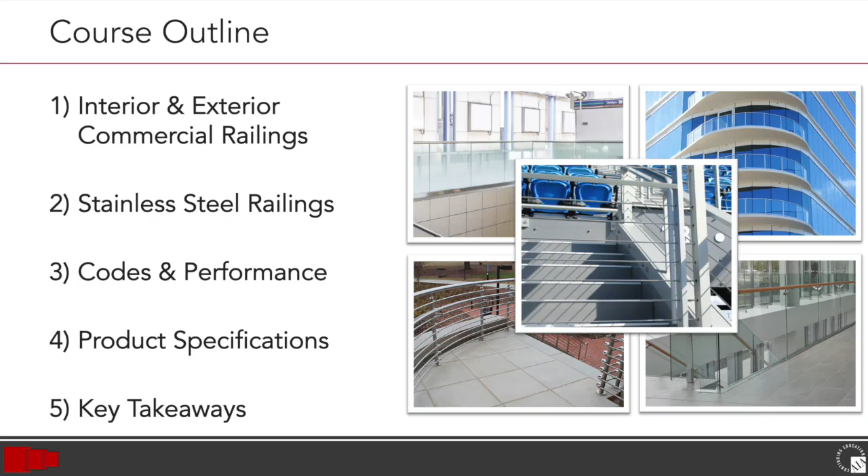First, we'll start with an overview of interior and exterior commercial railings, discussing the various railing types, materials, and designs. Then we'll discuss stainless steel railings, sharing the features and benefits in using stainless steel as a railing material and the various design options and grades of stainless steel. Next, we'll provide a high-level overview of codes and performance related to commercial railings, then get into the considerations for product specifications, and then wrap up with some key takeaways from the presentation.

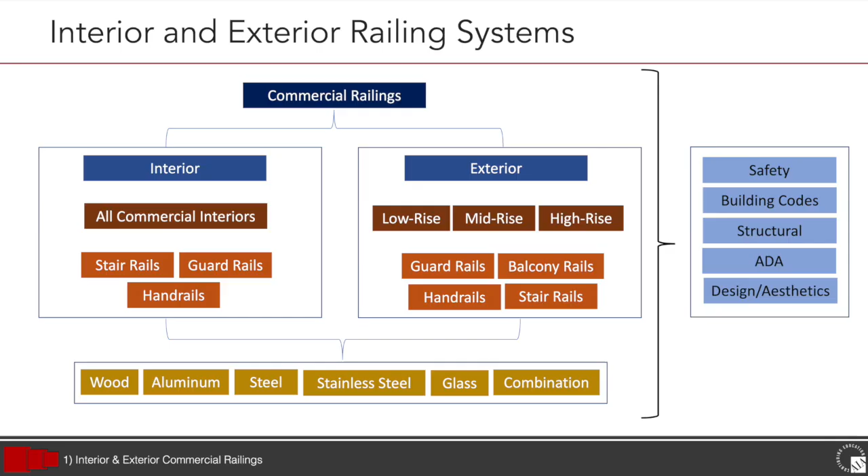So, in its simplest of terms, commercial railing systems must provide safety, must meet local and national building code requirements, are an important architectural element of your building, can actually help define the building's facade, and today more than ever, there are many design options to consider.

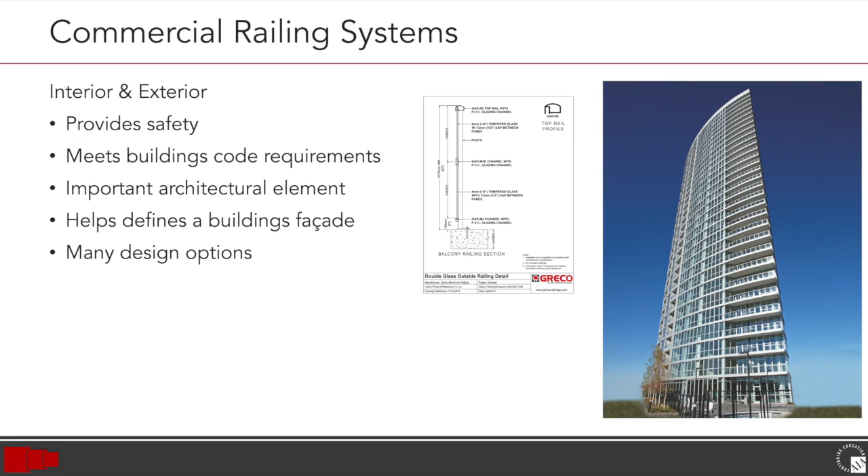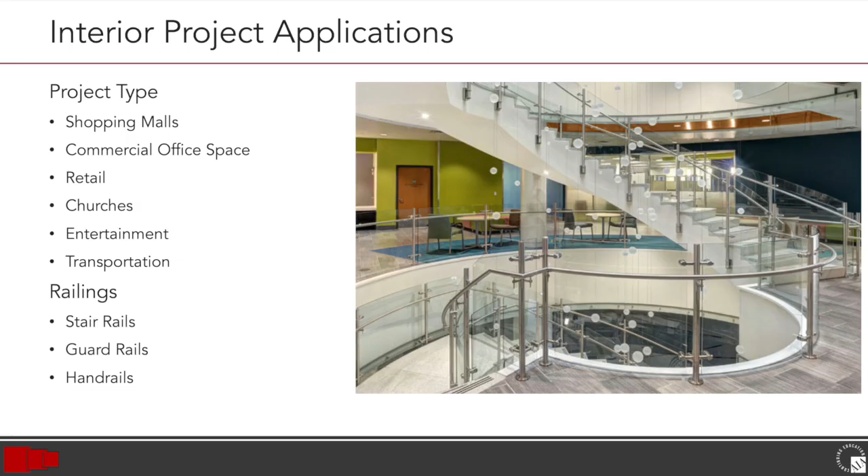So let's first take a look at interior projects. The type of projects where railings play a critical role can include, but are not limited to, shopping malls, office space, retail, churches, entertainment, and transportation. The most common types of railings in these projects are stair rails, guardrails, and handrails. When we look at exterior railings, we typically see them play a critical design role in multifamily construction, commercial buildings, and institutional projects. Typical railing types in these applications include guardrails, balcony rails, and handrails.

Now let's look at the different types of railings. When we're talking about railing types and designs, we have pickets, panels, glass, cable, and custom. Let's start with picket railings. Traditional vertical pickets are by far the most popular railing design. It can offer both a classic or a contemporary look depending on design and material. Picket railings are strong, attractive, and versatile, and are widely specified on commercial projects due to their refined elegance and longevity.

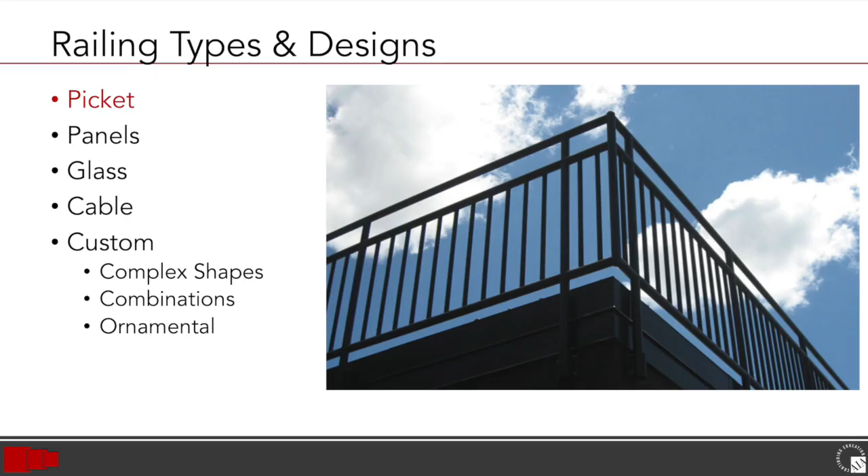Panel railings, or railings with panel infills, can be as simple as plain metal panels or decorative perforated panels. Perforated panel railings can be designed with custom punches and can offer a wide range of shapes and designs. Although plain metal panels are an option, most panel designs offer a perforated design pattern to add interest to the project while still providing a level of privacy and concealment.

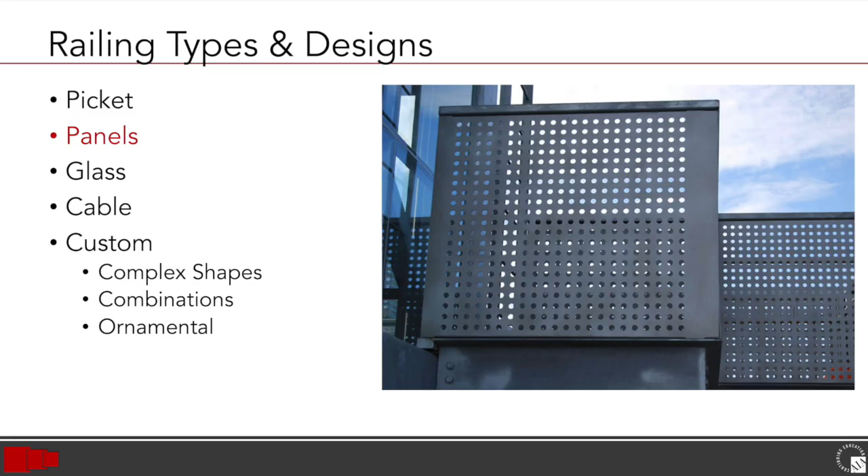One of the most popular infills for commercial railings is glass for both interior and exterior applications. Today we see glass railings in almost every railing application. Glass can be used as a traditional infill or as a structural railing on its own without post or top rails. Glass is one of the most versatile products in the industry, offering a contemporary look with a high level of performance depending on the railing design and glass makeup.

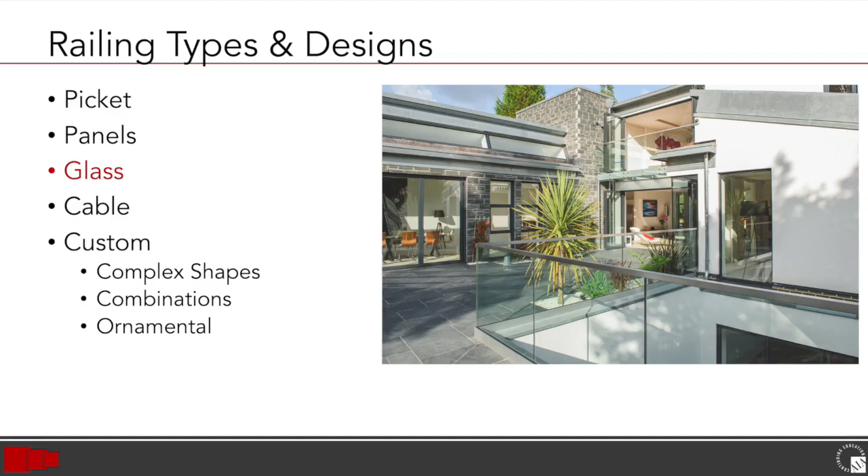Cable infills have become a popular choice for railings as they are both contemporary in design and provide minimal obstructed views. The cables can come from various diameters, typically ranging from 1/8 of an inch to 1/2 of an inch. Cables are typically stainless steel due to the rigidness and durability and looks.

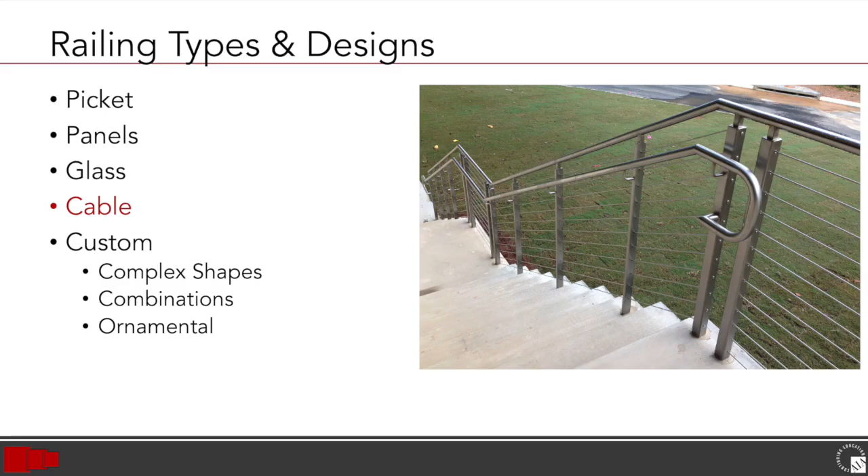Custom railings can offer a combination of styles or designs with unique shapes, colors, and finishes. Custom railings can range from traditional ornamental to sleek and contemporary, with both simple and very complex shapes. Now let's take a look at the various materials and components that can make up a railing. As railing types can create a specific design or look, the material used can define the style, performance, and durability.

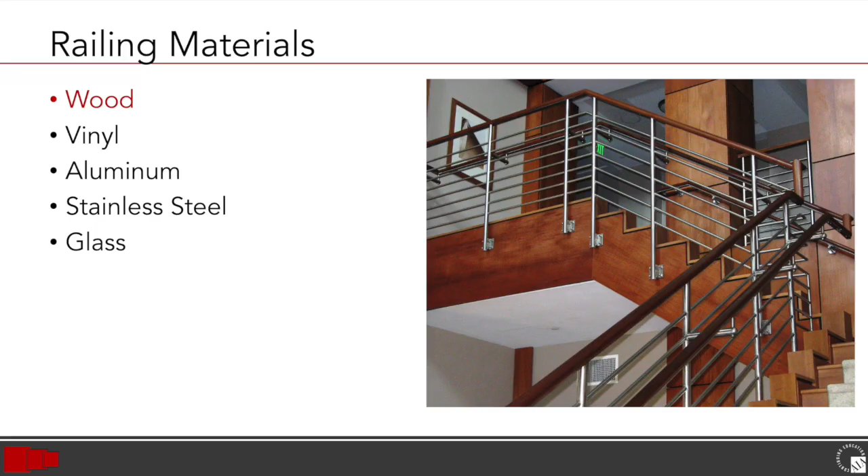Commonly used materials for railing posts include wood, vinyl, aluminum, stainless steel, and glass. Wood provides a classic look, and as long as the wood is treated properly, they should be durable and have a relatively long lifespan. With wood posts, the force is directed to the joists and rim joist connections, and so builders need to pay close attention to post and joist framing procedures and select the most appropriate fasteners. There are a wide variety of framing techniques, each of which carries with it different challenges and cost.

Vinyl railing systems are considered low maintenance because they are easy to clean with common household solutions and do not require painting. Vinyl does not rot like wood and does not corrode like some metals. However, in some geographic locations, the stability of vinyl can be affected by extreme hot or cold temperatures. The structural posts and top and bottom rails are commonly reinforced with aluminum or steel, and with metal-to-metal connections and hidden fasteners, the aesthetics of the railing systems remain intact.

Wood plastic composites offer a look of natural wood grain patterns in a variety of colors, but unlike wood, they do not need to be stained or painted. They also have a much lesser tendency to rot, warp, or splinter.

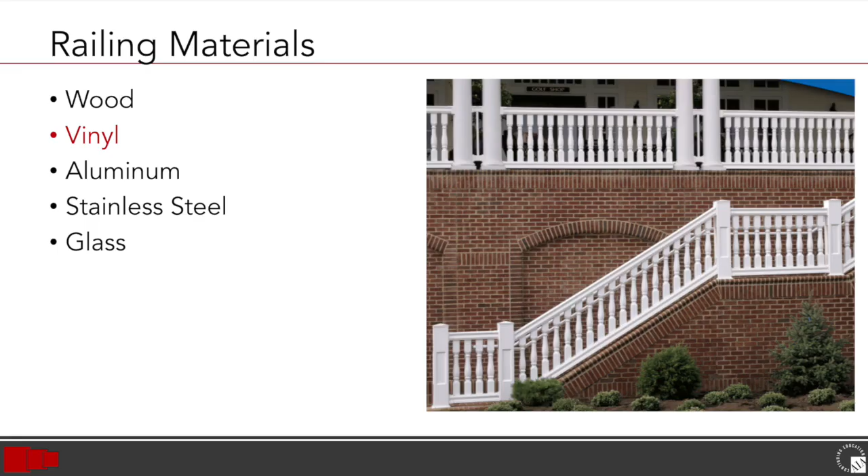Aluminum is commonly used in off-the-shelf systems because of its lightweight and easy installation options, and because they tend to be more durable than wood or vinyl. They distribute the load well and are usually coated with a powder coat finish to help prolong the life of the metal. Aluminum is a non-ferrous metal that is lightweight, strong, and known for its resistance to corrosion. Aluminum railings can be powder coated or anodized to meet the aesthetic requirements of the project, and over the long term require relatively little maintenance.

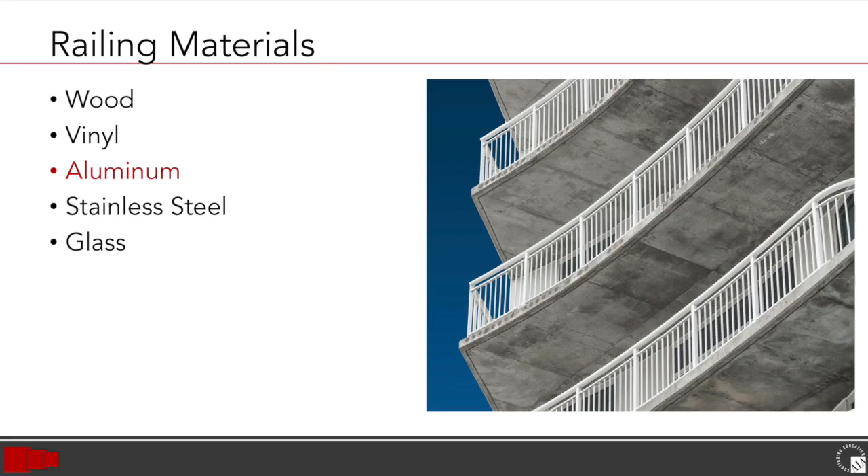As a railing material, aluminum offers ease of fabrication and versatility in design, and as such is used for structural components and decorative panels. Although commonly used in areas that require greater resistance to corrosion, aluminum is one of the softer metals in use. Aluminum tube is available in a large variety of shapes through the process of extrusion. It can be cut, deburred, or welded. Fasteners and fittings are readily available and used in conjunction with tube, adhesive, and/or welding. This makes for an effective way to build railings.

Stainless steel tends to combine the best of all worlds in that they are strong, durable, and are usually engineered to exceed most local building codes. Stainless steel can be fabricated with a range of finishes. Stainless steel can be brushed, polished, powder coated, and plated easily. It resists corrosion very well and has the capability to maintain its luster for a long time, and maintenance requirements are low.

Stainless steel, like steel, is stronger and more durable than other metals and therefore allows for leaner designs to be employed in railings. The major advantage of stainless steel over steel is that it is more resistant to corrosion. Again, like steel, stainless steel tubes can be found easily in round, square, rectangular, or oval shapes. It can be cut, deburred, and welded. Additionally, fasteners and fittings for stainless steel tubes are readily available.

As we've mentioned earlier, glass as a material is extremely durable and can be used structurally without post and top rails. The glass makeup and how it's treated will dictate the strength of the glass. Glass can also be tinted or colored to create visual interest or to provide privacy.

Let's take a quick look at the typical components of a railing system. Traditional railing components include a railing post, the railing infill, and the top rail. Together, these components make up the main visual and structural element of a railing system.

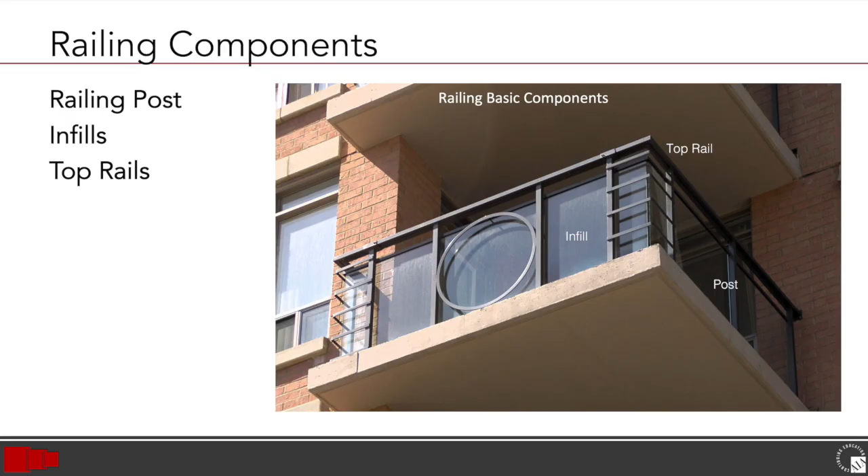There are many different options for component materials, with either a single material or a whole system, or with different materials combined for a railing that is unique to the specific building project. In addition to being designed to enhance the building aesthetic elements, railings should be designed for strength, durability, and safety.

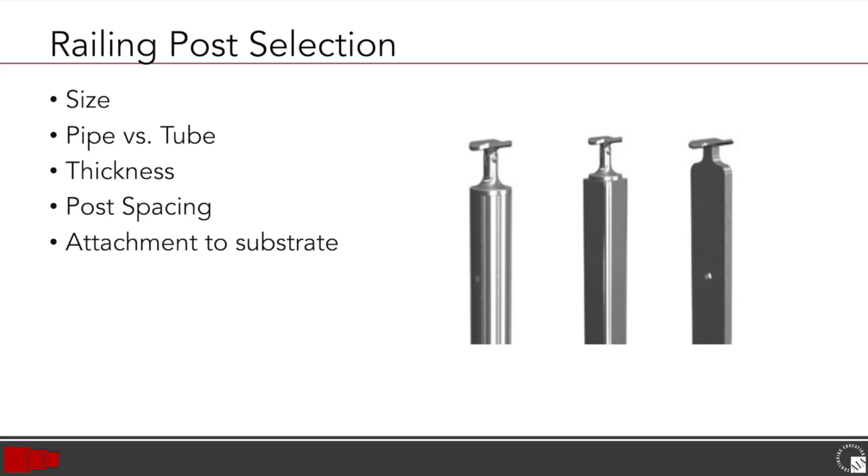In general, when selecting the railing post for a typical railing system, the critical design elements include the size of the post, spacing, and the type of attachments. Additionally, for metal posts, you need to consider pipe or tube post and the thickness of the metal.

There are three basic post attachment methods or mounting options: side mounts, top mounts, and core mounts. These different mounting options can vary based on various circumstances. Side mounts are mounted on the fascia and cannot be seen from the deck or floor.

Top mounts are fastened directly to the top of the deck or floor, with the fasteners being exposed or covered with a cover plate. And core mounts are core drilled into the deck, typically concrete, creating a concealed attachment. Base plate covers can be applied for aesthetics.

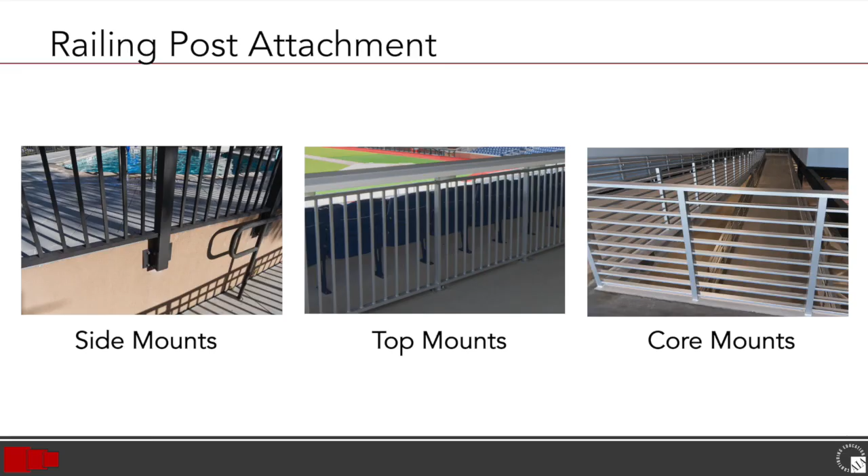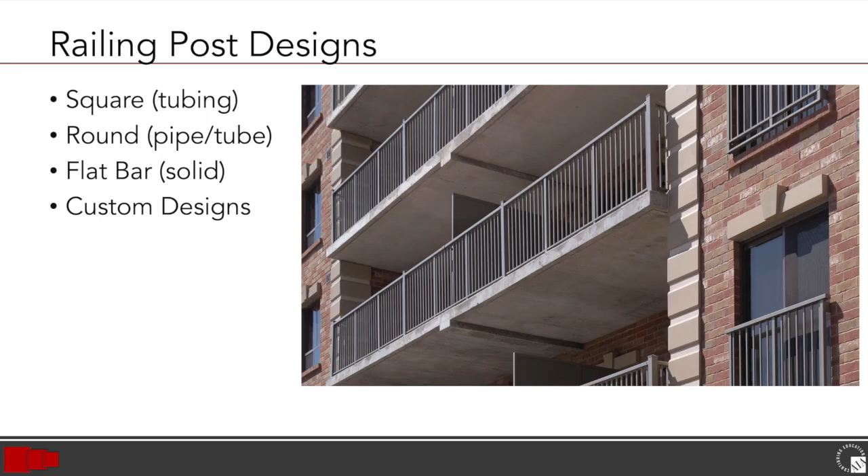For metal railing posts, there are a variety of railing post design options. Typically, you'll see square tubing, round tubing, a flat bar post, or a custom design post. The infills are where things get interesting, creative, and really define the look of a railing. Functionally, the infill is a critical component of the railing system and its performance.

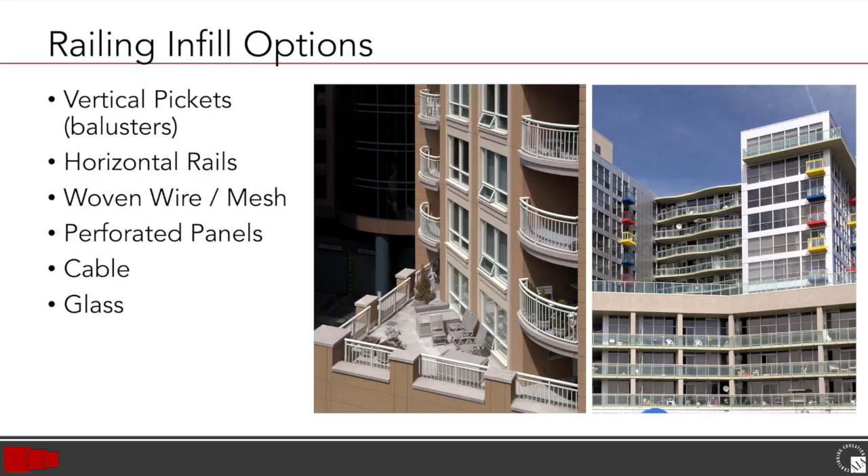Infills can be made of bar rails or balusters and run vertically. This type of infill on railings is referred to as a vertical picket, or more commonly, picket railings. You can also have bar rails that run horizontally for a more contemporary look. Woven wire or metal mesh is another infill option.

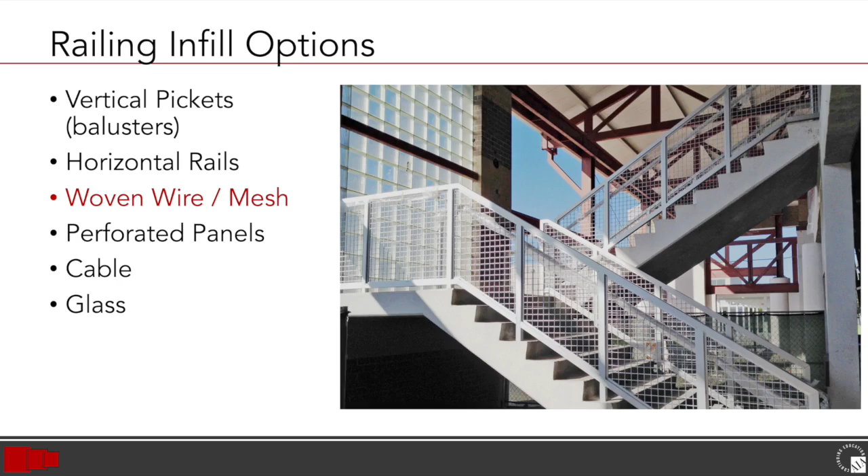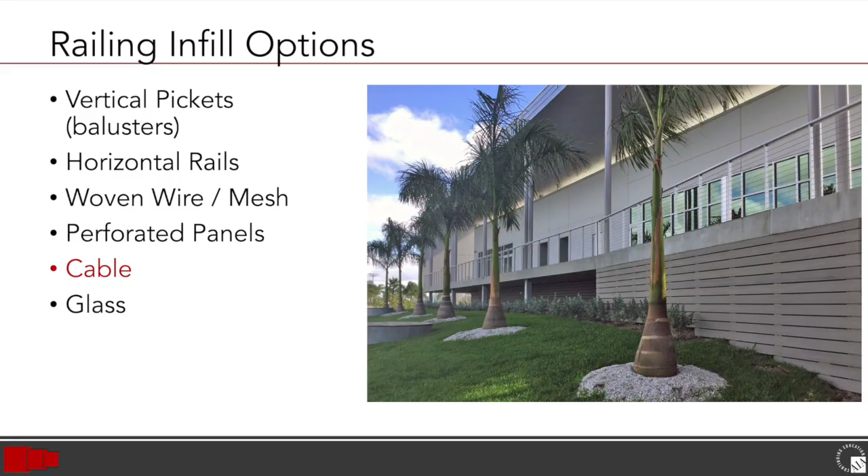Perforated metal panels can offer a contemporary industrial look. Cable infills can be designed both horizontally or vertically and provide a great option to minimize visual obstruction. And last, as discussed earlier, there is glass, which can be used in a traditional railing infill.

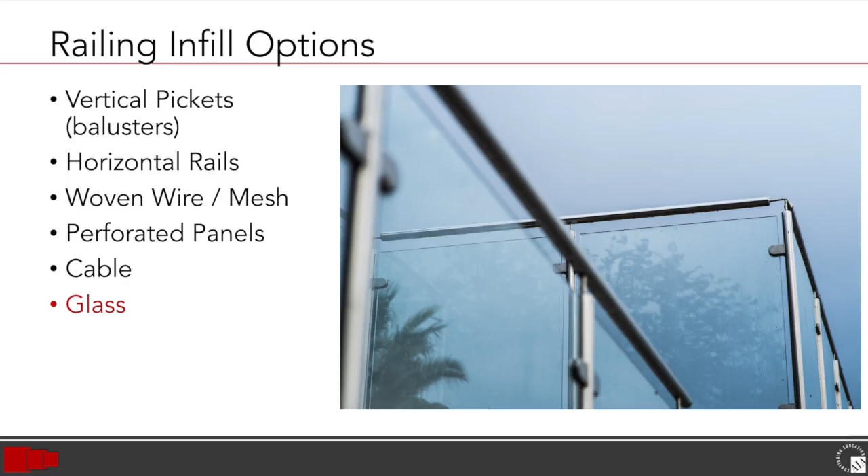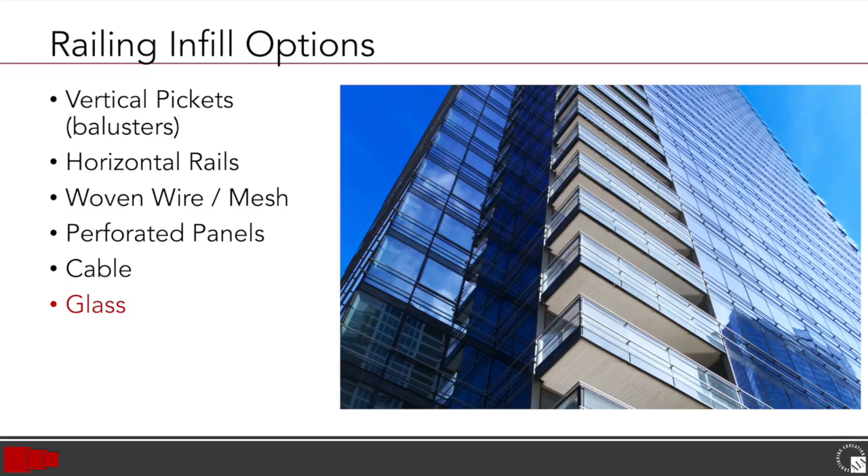Depending on the placement and purpose of the railing, health and safety considerations will also factor into the material and infill choices. For example, a railing system on a multi-story apartment building or hotel may include tempered glass panels as infills to provide a solid physical barrier between the decks and the ground.

Alternately, a homeowner who installs a new deck in their yard may desire a railing that provides a clear line of sight to the yard without the frequent cleaning required of glass, and in this case, cable rails may be the perfect solution, or vice versa. In short, the project needs and desired aesthetics will determine the infill solution and the material.

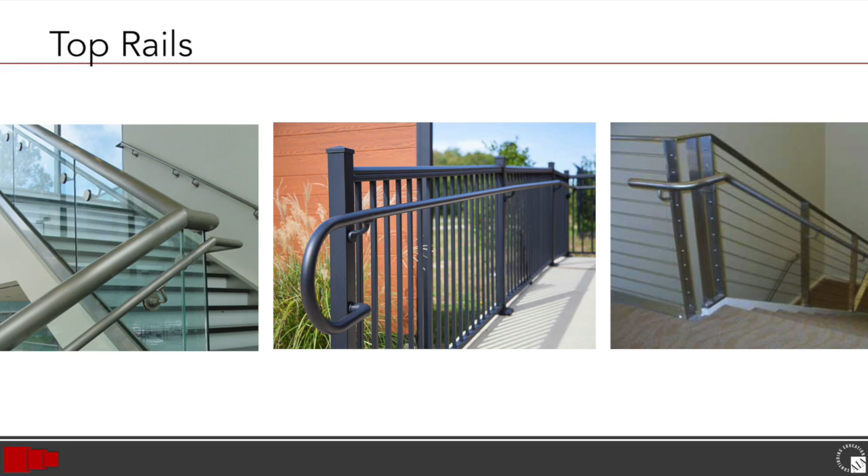Not all railing systems have top rails, as you can see in this glass railing system. When selecting or designing a top rail, there are many factors to consider, such as style, shape, material, color, and finish. The choice of a top rail can also be based on function. For example, a flat surface for placing objects on, or an easy-to-grasp railing for stairs, as well as aesthetics with contemporary or traditional styles.

Top rails can be designed to be attached to the face of the post using rail connection brackets, while others rest on the tops of the post and are secured with fasteners. Handrails, as we mentioned earlier, can have extensions and returns and are available as an accessory or custom design to meet ADA and specific handrail building codes when required.

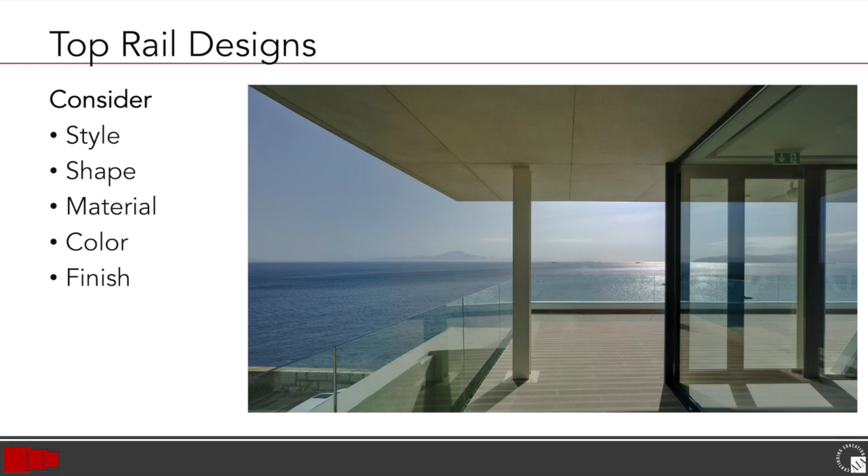As with posts, the top rail is also usually made of wood, aluminum, composites, or stainless steel. The material choices have similar pros and cons. For example, wood top rails make an aesthetic statement and work well for interior railing systems.

However, even the best treated wood will eventually give way to the elements when used outdoors. Aluminum and composite materials are subject to wear and tear as well. Additionally, some composite materials require a supporting structural component to reduce the risk of deflection in the top rail.

And as with posts, stainless steel works as an ideal material because of its longevity, corrosion resistance, and finish options. For example, a brushed stainless or satin finish can be beneficial for top rails to retain less heat than highly polished surfaces, and thus ensure that the railing can be comfortably used even in the hot sun. The benefits take into consideration the health, safety, and well-being of building occupants and the general public by allowing the rail to be used regardless of the time of year, all while allowing the designers the freedom of creative design for aesthetics.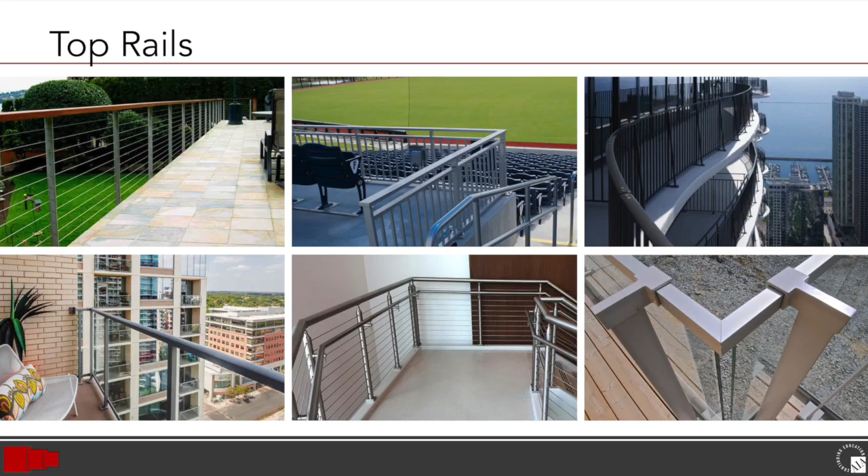So now let's dive into our main topic of stainless steel railings. Stainless steel as a material is one of the most forgiving materials when it comes to durability and aesthetics. Stainless steel resists corrosion and is very easy to maintain, whether used for railing systems or home appliances. The aesthetic element stems primarily from how the steel is finished, whether that finish achieves a highly polished mirror look, a refined brushed satin look, or adds color and texture through the powder coating.

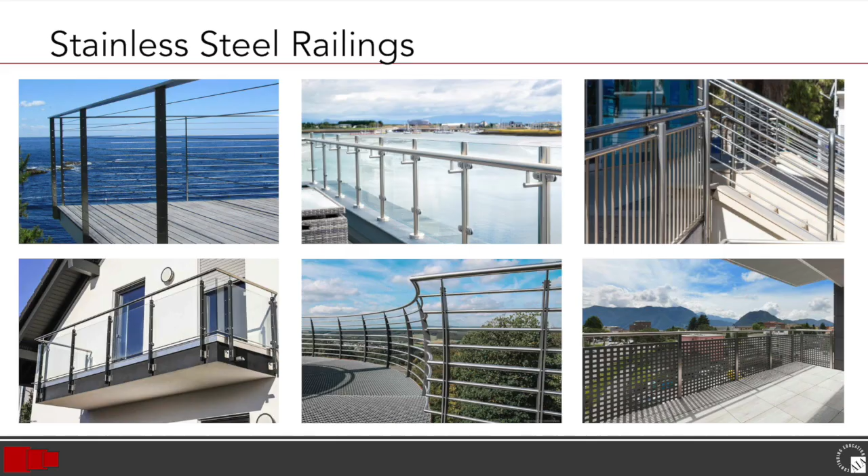In this section, we're going to address 3 areas. Why use stainless steel? We'll look at the advantages and benefits of using stainless steel. Then we'll review designing with stainless steel, addressing some of the design options that are available. And last, we will discuss the various types of stainless steel grades and the importance of understanding which type of stainless steel grade should be used.

So why design with stainless steel? Well, there's a multitude of reasons and benefits to consider. Let's start with strength. Stainless steel is stronger than aluminum. The tensile strength is measured as force per unit area, and in the international system of units, the unit is the pascal. A multiple is called megapascal, or MPa. The ultimate strength for stainless steel is 590 MPa versus that of 300 MPa for 6061-T6 aluminum.

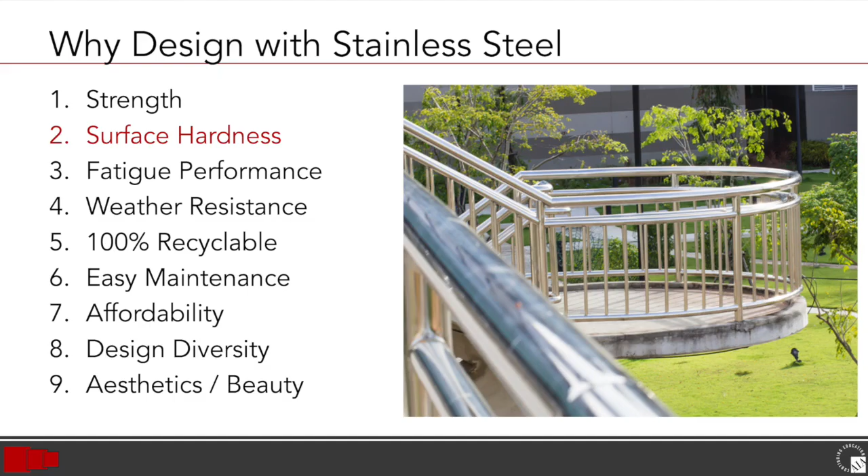The benefits of stainless steel's additional strength are evidenced in the railing system's posts and handrails, which can be constructed to be much thinner than those made of aluminum. A strength equivalent stainless steel post is 50% thinner than an aluminum post. Moreover, the surface hardness of stainless steel is much higher than that of aluminum, and thus it resists scratches and is easy to maintain as compared to aluminum counterparts.

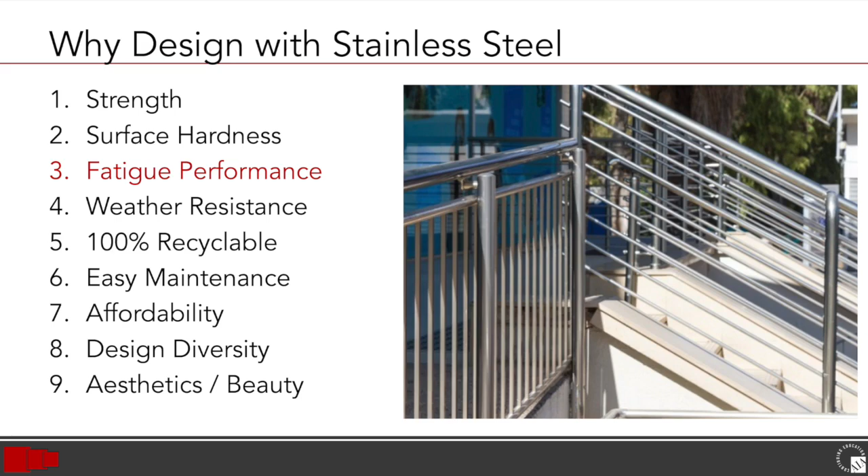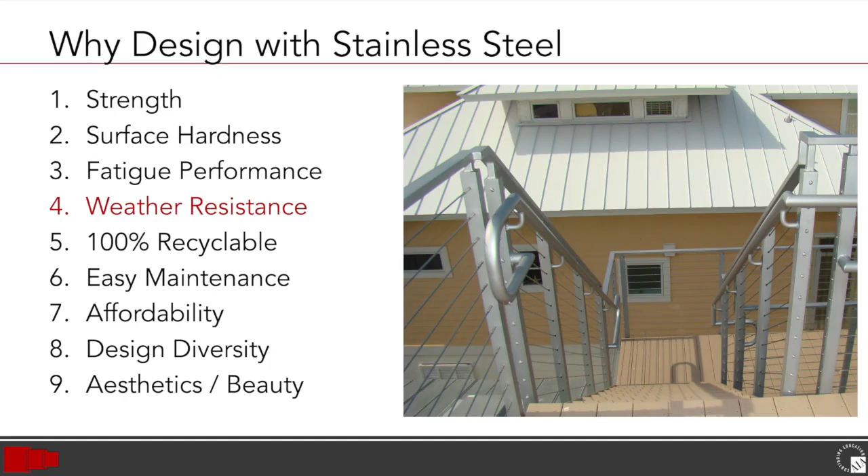Additionally, stainless steel's fatigue performance is twice that of aluminum, and that adds to the product's durability. In terms of railings, a stainless steel rail will likely provide more years of safe, aesthetically appealing use than an aluminum system. Stainless steel railings offer superior weather resistance compared to any other railing material type. Stainless steel is the most immune metal to corrosion and is not affected by the sun's ultraviolet rays, providing a long-lasting, weather-resistant material.

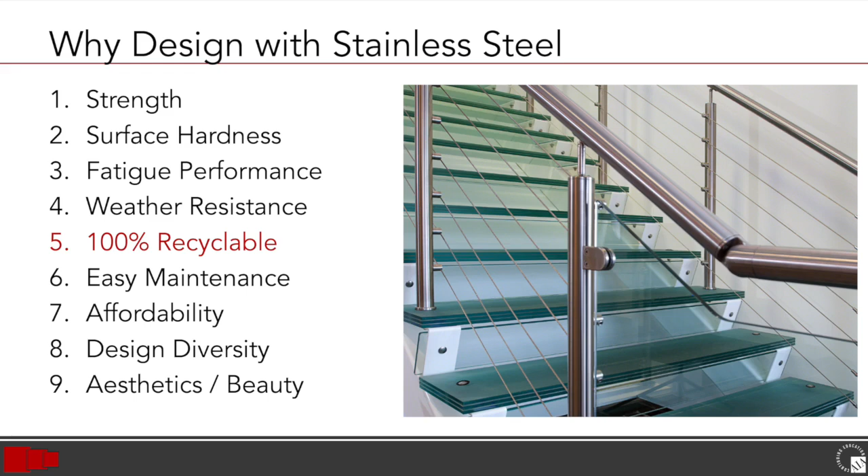Stainless steel is readily recyclable, encouraged by the ease of traceability and inherent value. This therefore helps to reduce the overall environmental impact of a structure, which is an important factor when considering choice of materials. With some of the features just highlighted regarding strength, surface hardness, resistance to corrosion, and weatherability, stainless steel is almost a carefree material. To remove any dirt, marks, grease, etc., wipe it down with a damp cloth. That's all you have to do for maintaining a stainless steel railing. They are low maintenance because stainless steel railings will not crumble, fracture, or bend over time.

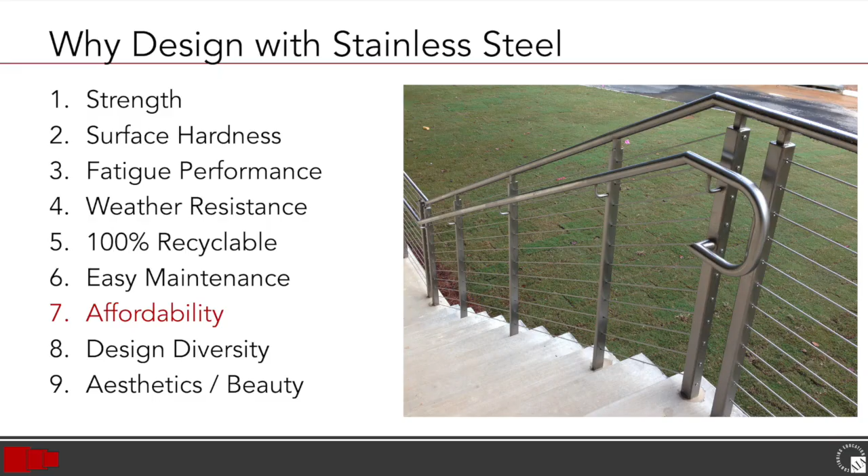Affordability. This is probably a benefit that you would not think of when it comes to stainless steel. But because stainless steel is a much stronger material, it takes less material to generate an equally strong railing system, which is why aluminum posts and handrails tend to be much larger and thicker than their stainless steel counterparts. A strength equivalent stainless steel post is 50% thinner than an aluminum post. Additionally, stainless steel doesn't require periodic finishing or maintenance to retain its appearance and can endure all weather without losing its shine. Stainless steel railings are virtually zero maintenance with high strength, providing a very long life to the product.

Aside from the strength and maintenance benefits, stainless steel railing systems can be customized by the architect or designer to meet the specific aesthetic and specific needs of the project. Architects can optimize their design to make the most of the sight lines or create thin profiles, providing their clients with a personalized visual aesthetic that meshes seamlessly with the building's design.

Stainless steel railings offer a wide variety of infill options that can maximize safety while minimizing visual obstruction of the surroundings by the railing. For example, in situations where physical safety is of paramount importance, a laminated glass infill may be used to provide a solid barrier while still offering unobstructed views.

Glass infills, which we'll talk about in more detail when we discuss various infills, can also help reduce the impact of the wind, which can also be a hazard in some regions. The strength and durability of a stainless steel railing system can provide this added level of safety, all while emphasizing a sleek, modern design. Finally, stainless steel provides a much greater visual impact to any project.

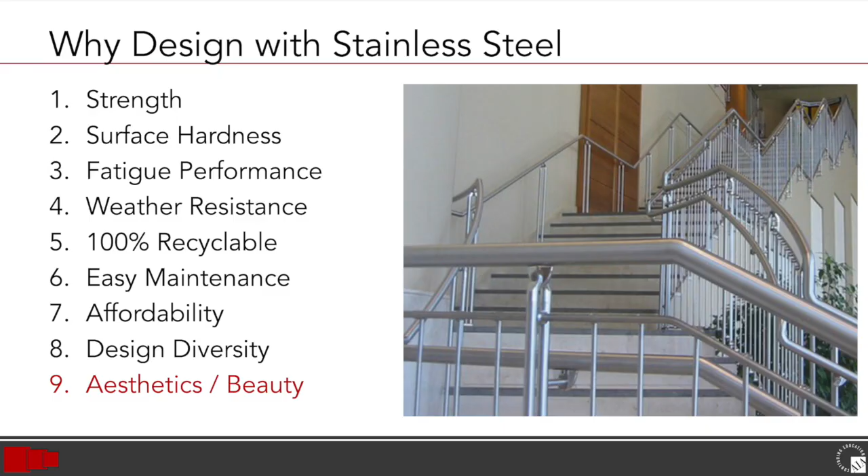A lot of commercial and residential structures use railings made of stainless steel to enhance the beauty and strength of their buildings. Stainless steel provides a sleek and modern look, particularly for structures with contemporary designs. The good thing about stainless steel railings is that you can choose a particular design from a wide variety of available options based on your preferences.

You can even have the railings customized according to your specific requirements. In addition, the material is durable and long-lasting. It is the most preferred metal for construction in general, and railings in particular.

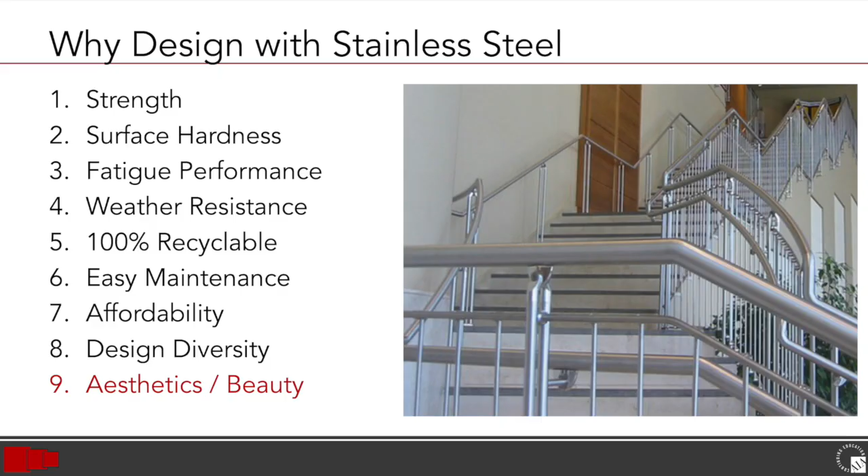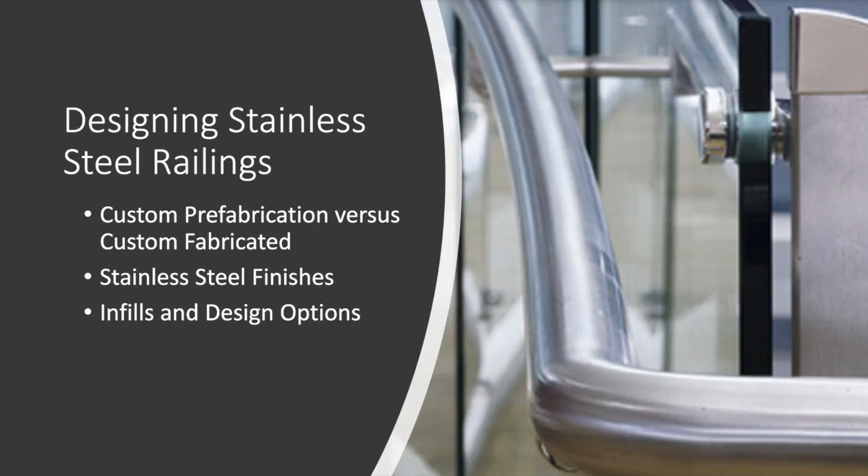The basis of design for stainless steel railings, similar to other railing types, is the railing post, typically square or round, a top rail, which can be optional depending on the design, and an infill. Common infill options are stainless steel cable, variations of glass or stainless steel bars. Other necessities can include a base cover for the post-mounted handrail brackets or mounting top rails, and end caps or wall returns for the top rails.

Stainless steel railings can be offered as prefabricated or custom fabricated. We'll discuss both options. Understanding the pros and cons and how a railing system is fabricated should be one of the first design considerations. We will then look at the various finishes that are available with stainless steel and finish this section with the various infills that will dictate the overall look and style of a railing system. We're going to focus on some key elements of design by comparing prefabricated and custom fabrication, the various finishes that are available, and then look at the most common design options.

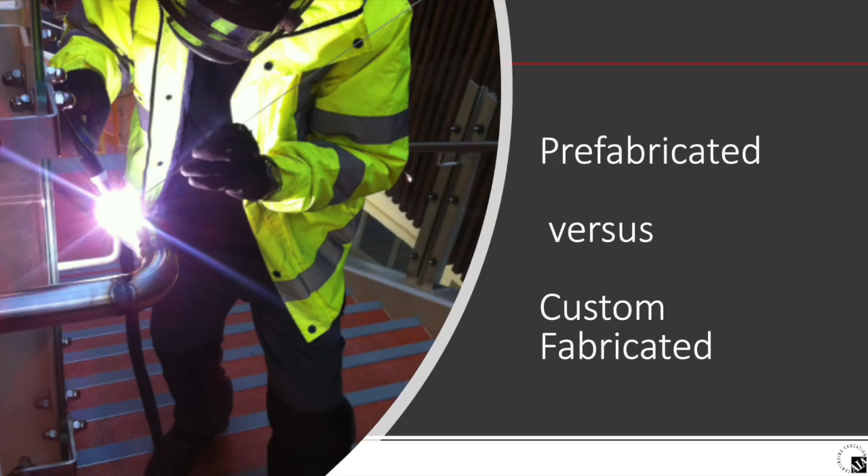Prefabricated or component systems for stainless steel railings is a knockdown system where the post, top rails, and all the parts and pieces are all prefabricated and put together per the approved railing specifications. Prefabricated stainless steel railing systems offer a fairly simple approach to designing and selecting a railing system. However, from a design and potentially performance standpoint, there are limitations with the type of stainless steel systems involved.

Here are the critical elements with a prefabricated or component railing system. The system is pre-tested and approved to meet specific building code requirements. This may or may not meet your specific project requirements, so be sure to understand what the system and components you select are qualified for.

There is a variety of components to select from to create your railing system, but keep in mind you must use the systems offered and typically cannot customize in any way. The railing designs are semi-customizable by mixing the different approved components. CAD drawings should be available from the fabricator on specific railing component designs.

Delivery time can be short if all the components are in stock from the fabricator. However, don't assume because it is a prefabricated system that all components are available. There may be lead times to either order the parts or materials.

In most cases, the quality of the components and overall railing system is quite good. However, like with any fabricator, manufacturer, or supplier, the quality can vary, so be sure to do your homework on who's providing the system. The overall assembly should be fairly straightforward. The quality and time to assemble will be based on the site conditions, environment, and installer.

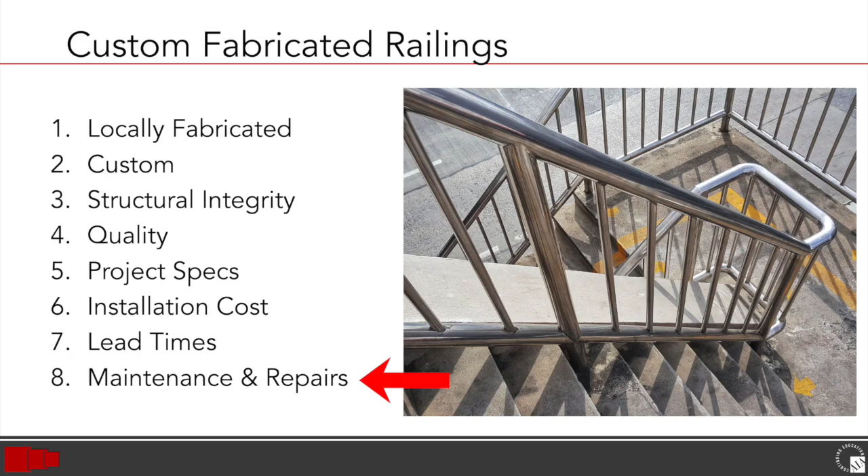And don't assume custom railings will have a significant long lead time. In fact, custom railing systems can actually be comparable to prefabricated systems, as many components with prefabricated systems come from outside the country. And lastly, and probably one of the biggest benefits with custom fabricated railings, is that you will see a significant reduction in maintenance and repairs over the life of the railing system.

Selecting the right stainless steel finish for your application is very important. You're probably looking for a long lifespan, corrosion resistance, and low maintenance. However, the process can be somewhat confusing, as there are different standards that offer their own designations for each type of stainless steel surface finish. Some manufacturers even create their own in-house standards to designate the surface finishes of their products. From a specification standpoint, it's best to use the most recognized standards and to have the manufacturers match those standards.

The process to finish stainless steel is either a mill finish, a polish finish, or some other type of special finishing process. Mill finishes are produced by passing the stainless steel through a roll or die. They are often the least expensive option and range from dull to mirror-like. Polish finishes are produced by mechanically abrading the surface of the stainless steel with a series of abrasives. The grit size used depends on how rough the initial surface finish of the stainless steel being polished is. This process creates surface finishes that range from dull to satin to highly polished.

Special finishes can offer a unique aesthetic, such as swirls, patterns, or other custom designs. The techniques to achieve these special finishes can vary greatly depending on the fabricator. There are many types of stainless steel finishes. Each technique requires a varying level of labor to achieve. Furthermore, each technique can create an entirely different look. When specifying stainless steel finishes, it's important to understand that each finish type requires a different degree of labor, which will affect the cost. We're going to discuss the 3 most popular stainless steel finishes for architectural railings.

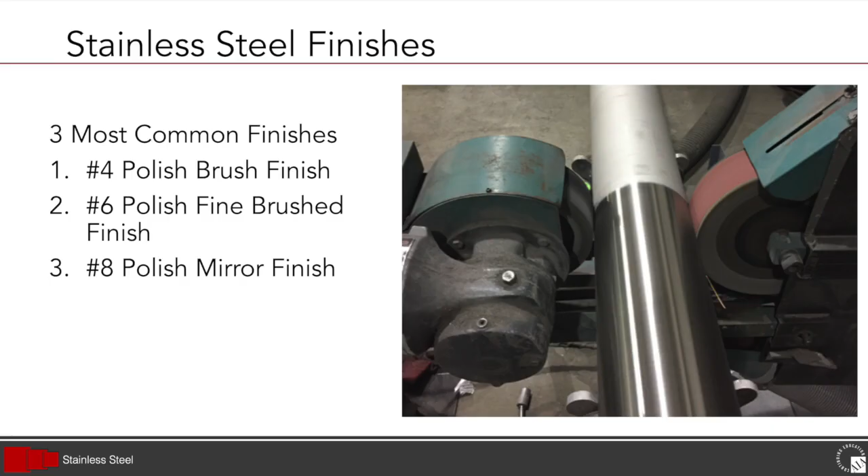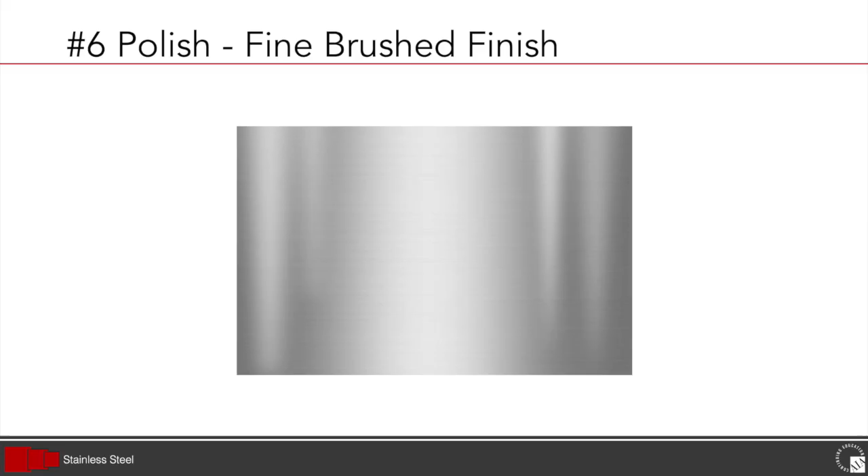A number 4 polish finish is achieved by sanding in a vertical direction using 150 to 180 grit abrasive sandpaper. This is one of the most common stainless steel finishes used in architectural metalwork. A number 6 polish finish will have a finer grain finish with a brighter sheen than a number 4 finish railing. Fine brush polished stainless steel requires the same sanding, but also must be buffed with a buffing compound on a cloth wheel. The quality of the surface depends greatly on the amount of sanding done and the fineness of the abrasives used.

And then we have the number 8 polish finish, which is a mirror polish. As you would imagine, it will result in a highly reflective finish. Mirror polishing requires a significant amount of buffing to achieve this reflective look. While polishing, great care must be taken to remove deep scratches. Any defects will show through and be quite noticeable once you reach the final stage. One benefit of a mirror polished stainless steel is that the finishing process improves the corrosion resistance. This is because it removes crevices where corrosion-causing chlorides can sit and do their work.

A key design component to the look and performance of a stainless steel railing is the actual infill. The infill can not only define the design of the railing, but also help define the architecture of the building or structure. We're going to take a look at the 4 most common infills for stainless steel: panels, cables, bars, and glass.

Panel infills offer an array of custom or standard patterns from manufacturers and allow for the creation and design of very unique railing systems or a very industrial or plain system, all achievable with panel infills. When designing with panels, there's typically less concern about having a visual unobstructed railing and more emphasis on the design element of the panels. Additionally, panel infills is typically the design choice if there is a need for visual concealment.

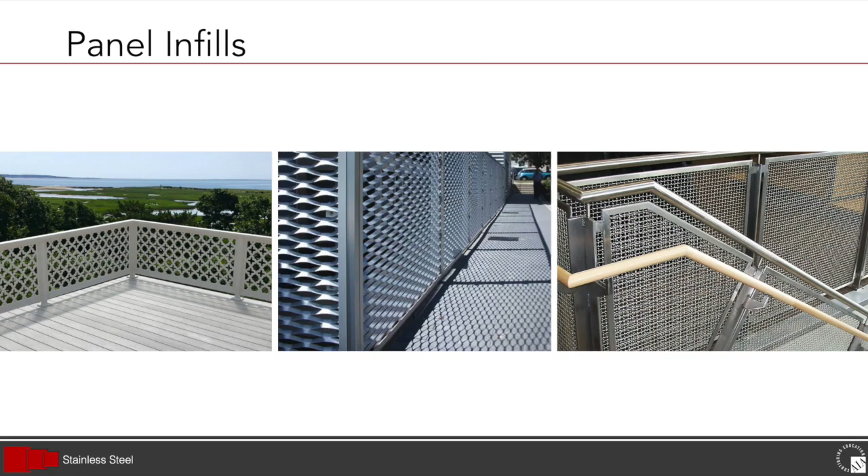When architects incorporate a railing system and want to provide a view, the last thing they want to do is obscure the view with the bulky railing system. With a stainless steel cable infill, you can provide a seamless connection between the built and natural environments, and thin cables can often become invisible from a distance, thus giving the illusion of an unobstructed view, and yet provide the necessary safety for the building occupants.

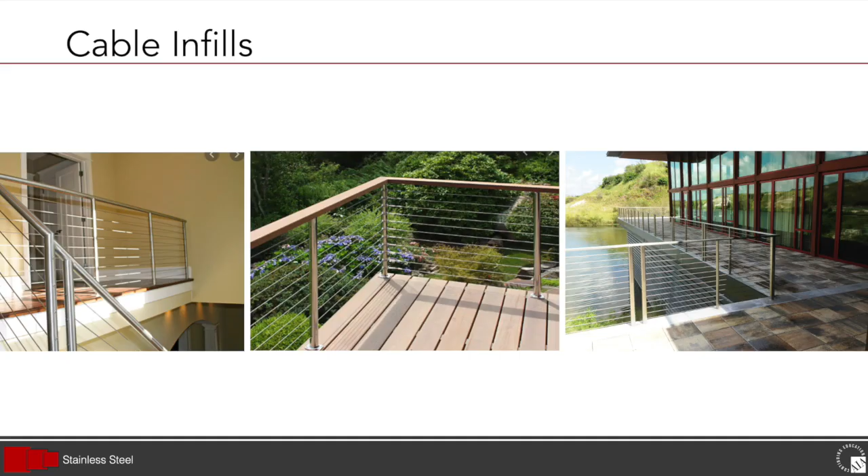Cable infill can withstand the wear and tear of different weather throughout the year, and because it is corrosion resistant, it requires minimal maintenance. While glass infills can keep the line of sight clear as well, it can get dirty, requiring routine cleaning. Stainless steel bars as an infill can be designed horizontally or vertically, depending on the design and style the architect or owner is looking for.

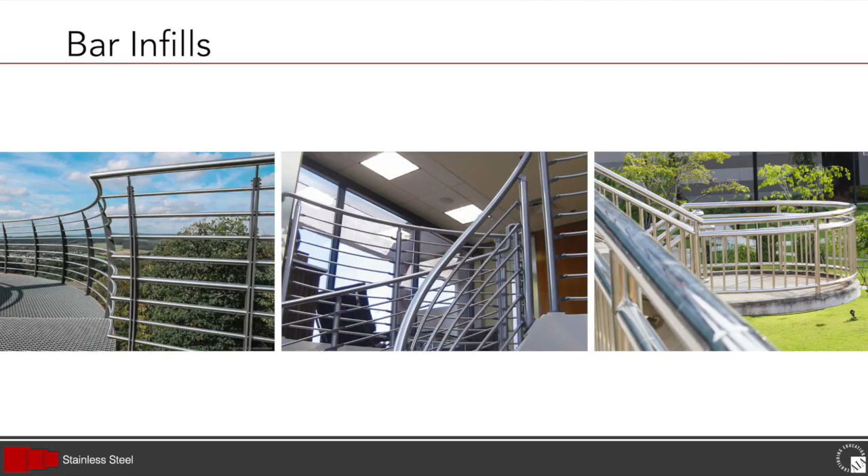Building codes are flexible on the type of material that is used, but require that the opening, such as between bars, cannot allow a 4-inch diameter sphere to pass through. Bar infills can offer a very elegant and contemporary railing design, allowing minimal obstructed views. Last on our list of infills is glass. Glass infills or glass railings are a very popular railing style for many reasons.

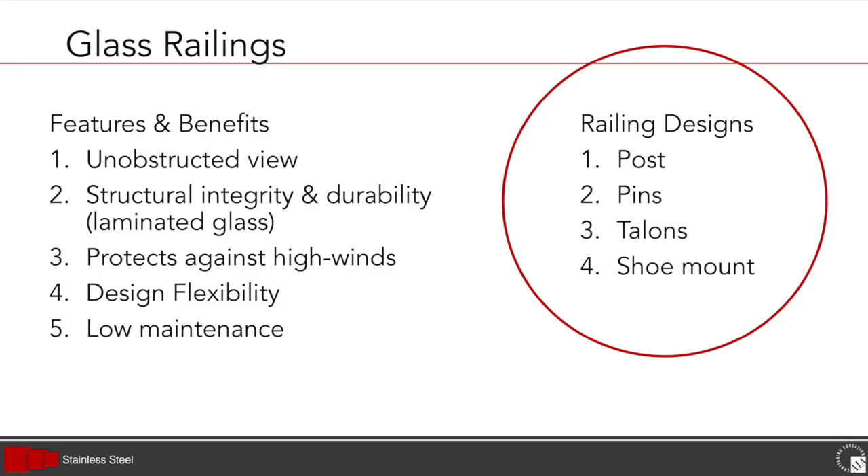Glass railings offer the following features and benefits: provides unobstructed views, has structural integrity and durability, protects against high winds, offers a variety of design flexibility, and provides low maintenance as a material. In addition to using glass as a traditional infill for stainless steel posts and end caps, there are a variety of stainless steel railing designs that incorporate glass, including post, pins, talons, and shoe mounts.

When designing a traditional post railing system with glass, there are a variety of designs that can create incredible unique railings, as well as very traditional railing styles. For a very modern and contemporary look that minimizes the structural element of holding the glass in place, stainless steel point supports offer a minimalist look with great adjustability. Here are a few examples of glass railings with stainless steel point supports.

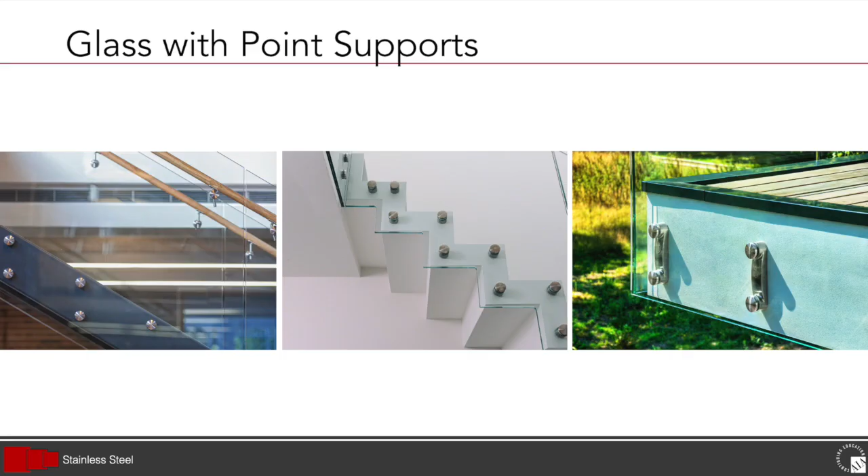Another minimalistic and contemporary look is with spigots. Spigots are easy to install and allow for water and debris runoff. This is a common application around pools and porches. As you can tell, practically all glass railing designs provide a clean, contemporary look.

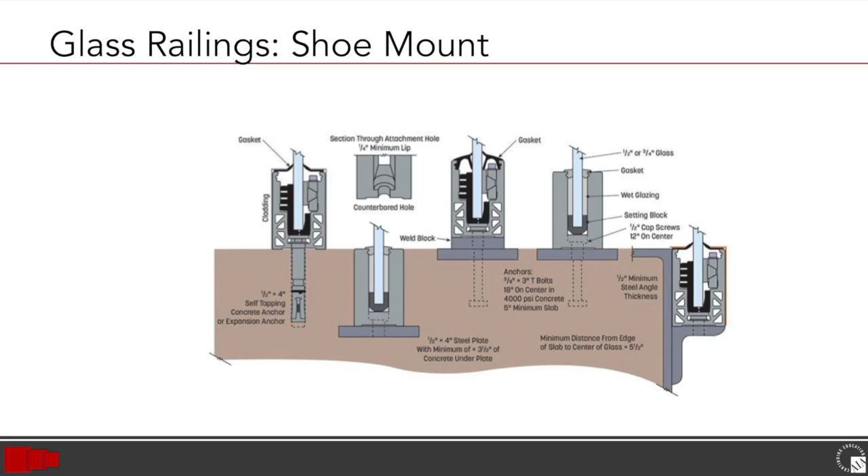A shoe mount for glass railings offers extreme strength and adjustability, again offering a frameless option with no exposed edges at the base. Railing caps can be applied for aesthetics, and handrails can be applied if required or desired. There are a variety of shoe mount designs that are offered by railing manufacturers. Two key design decisions include if the shoe mount is exposed or not, and if the system is wet glazed or dry glazed.

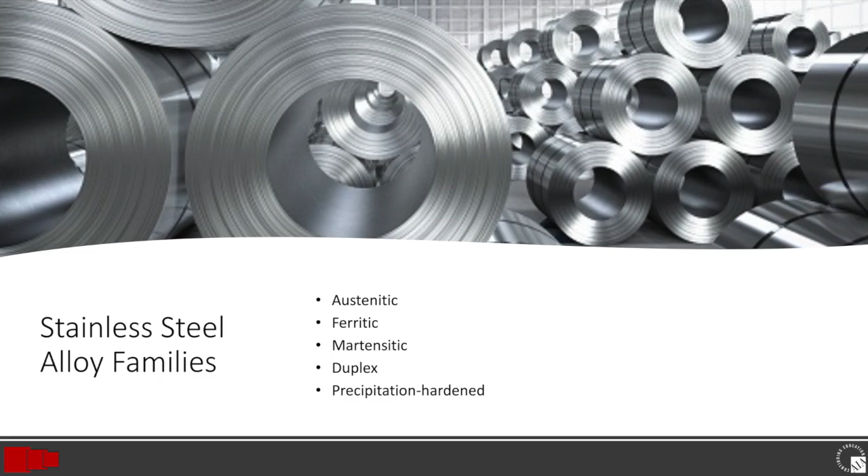So let's wrap up this section with a brief overview of the most common types of stainless steel grades used in architectural applications. Stainless steel comes in 5 distinct families of alloys, each of which offer particular benefits. The different grades are generally categorized based on their alloying elements, which is what determines the chemical structure and mechanical properties. The austenitic family is the 300 series of alloys and is the most common alloys found in architectural products and applications, and they account for more than 70% of all stainless steel production.

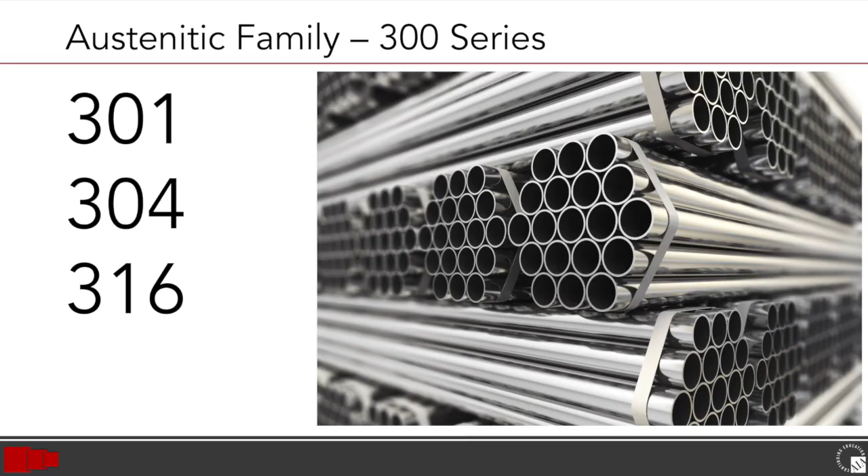The most common alloys or stainless steel grades are 301, a lower alloy grade that offers high strength and ductility. 304 is a general purpose grade and the most common stainless steel on the market. And 316, which has superior corrosion resistance and is thus found in many marine applications. It's worth mentioning 2 other stainless steel grades that are outside of the austenitic family and used in architectural applications. 430 is the most common alloy outside of the austenitic family and is part of the ferritic alloy family and is primarily found in interior architectural applications.

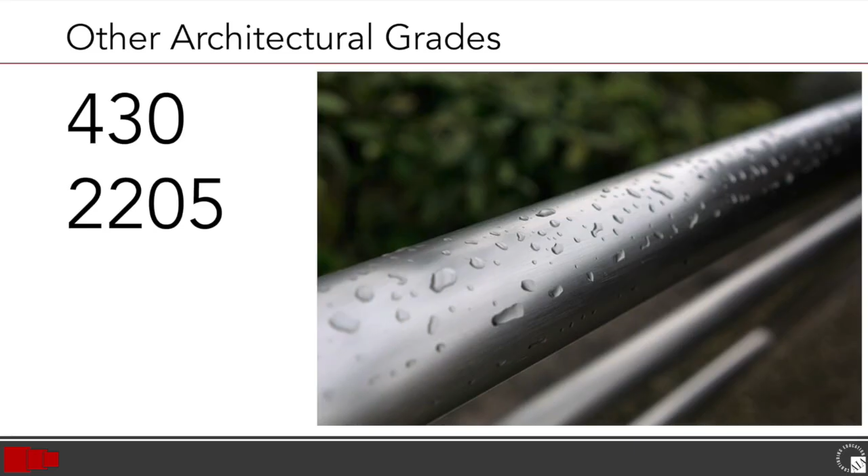And 2205 combines many of the beneficial properties of both ferritic and austenitic steels. 2205 is the most widely used duplex stainless steel grade. Its high chromium and molybdenum content gives the stainless steel excellent corrosion resistance and is a great choice when there may be potential issues of tea staining, which we'll discuss shortly. For exterior architectural railings, the 3 preferred and most common stainless steel grades are 304, 316, and 2205. Let's take a look at each and where to use them.

Stainless steel 304 grade posts and railings are often used in protected outdoor areas or areas where weather conditions aren't very harsh, and they don't need a protective coating and are usually finished with satin or mirror to protect from corrosion. 304 grade steel railings are also a great choice for indoor railings and need nothing more than regular cleaning with soap and water to maintain. One caution with 304 grade is to beware of installing stainless steel 304 in salty or chlorinated environments as they will cause corrosion.

For commercial railings with a higher resistance to corrosion, look for 316 grade stainless steel railings. The material's chromium content interacts with the air to basically repair and protect itself from scratches and rust. If your commercial railings will be used in industrial applications or outside, 316 grade steel is likely your best choice. It works well in more extreme environments due to the high corrosive resistance.

Although the 316 grade has a higher corrosion performance than grade 304, you should always consult with your manufacturer when using stainless steel in high salt or coastal areas to fully understand the level of corrosion resistance and expected performance for the specified stainless steel grade.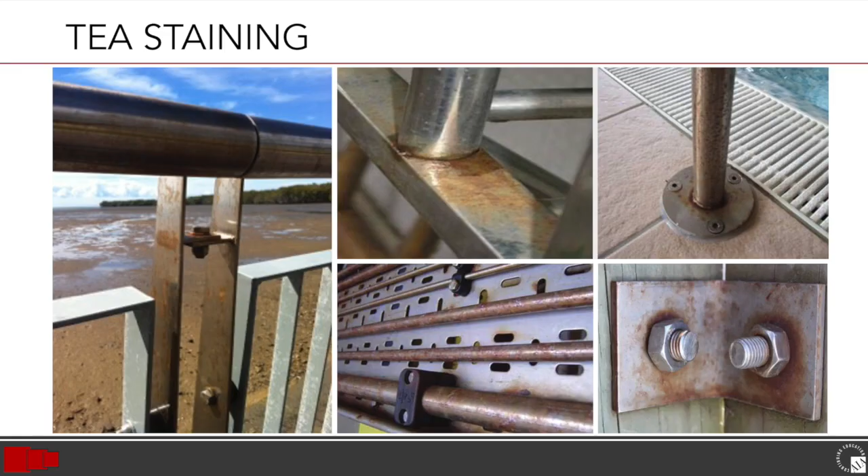So let's take a quick look at the stainless steel grades we just discussed and see how they compare with their resistance to corrosion. Each of the alloys that we have discussed have different corrosion resistance levels, which the steel industry created an index to measure, called the Pitting Resistance Equivalent Number, or PREN. As discussed, 2205 is the best performing grade of stainless steel, particularly against corrosion or tea staining. To see how it compares to the other grades, we can take a look at the PREN index. For an alloy to be fully corrosion resistant to harsh environments, you will need a score of at least 32 on the PREN index.

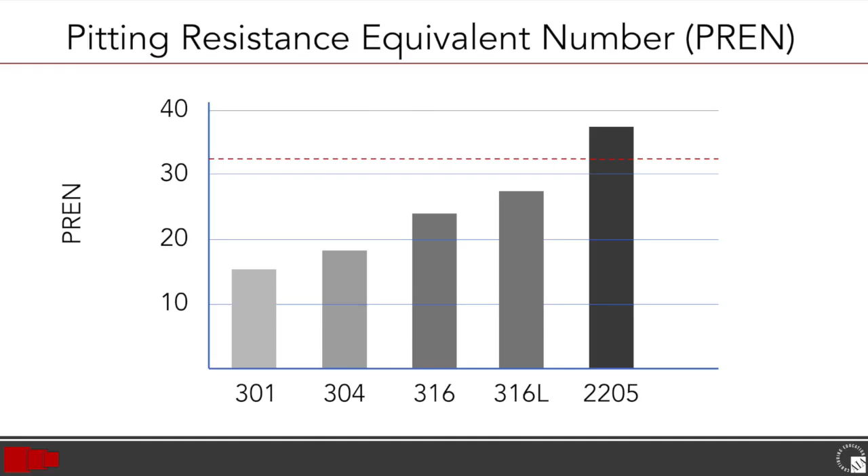Work with your railing fabricator to identify which products may be the best solution for your specific project. Today's architectural projects have high requirements when it comes to material selection, especially when it comes to metals. Architects need metals that are strong, durable, and lightweight, but which also can be cost-effective.

Structural components, especially those in which safety will be a key consideration, must be able to withstand extreme weather, climate, air pollution, and disasters from Mother Nature. Not to mention, the materials must be flexible enough to fit many different use scenarios while having an aesthetic appeal even after much time has elapsed.

Stainless steel, as the name implies, is best known for its corrosion-resistant properties. But the many benefits and revolutionary uses of stainless steel extend far beyond any single attribute, as we have discussed. Stainless steel is a perfect material for architectural railings, providing beauty, strength, and design flexibility. Working with the right railing manufacturer can provide the technical information and support to select the right type of steel and railing system to meet any design needs and requirements.

In this section, we'll take a brief look at railing codes and performance. We could easily have an hour-long course dedicated to this topic related to railings. For the purpose of our presentation, we're going to look at some of the most critical codes and standards related to railings and provide some key references. The most important thing to remember about building code requirements is that they are constantly changing, and it's critical that the railing manufacturers stay on top of the most current codes and standards.

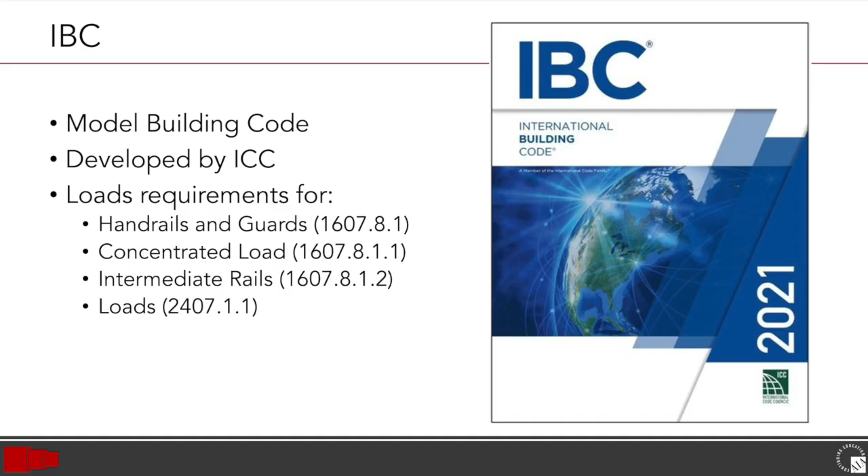The 2021 IBC minimum design load requirements for glass guardrails fall under 4 sections: handrails and guards, concentrated loads, intermediate rails, and loads. We will take a brief look at each one of these code requirements that are critical to glass railings. Let's start with the IBC load requirements for handrails and guards. Handrails and guards shall be designed to resist a load of 50 pounds per lineal foot applied in any direction at the top and to transfer this load through the supports to the structure.

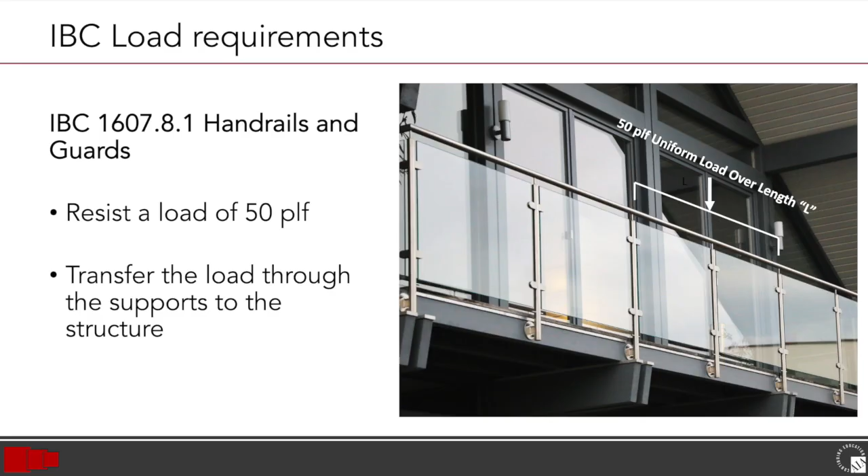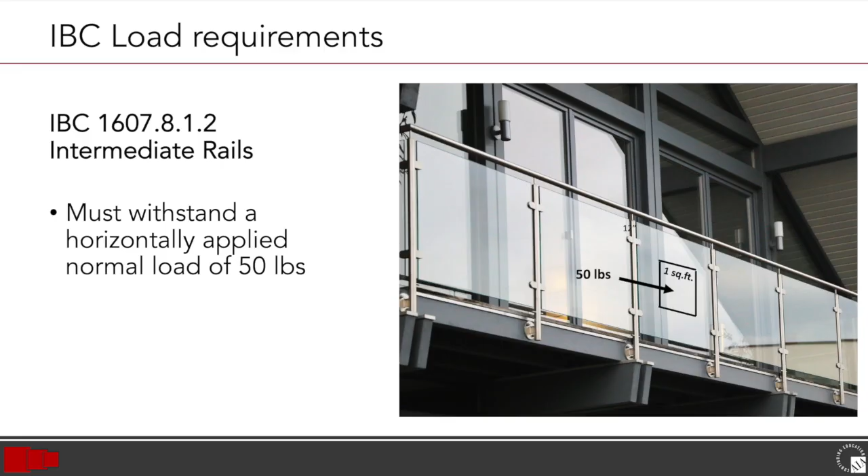For concentrated loads, handrails and guards shall be able to resist a single concentrated load of 200 pounds applied in any direction at any point along the top, and to transfer this load through the supports to the structure. Intermediate rails, which are all those except for handrails, including balusters and panel fillers, shall be designed to withstand a horizontally applied normal load of 50 pounds on an area equal to 1 square foot.

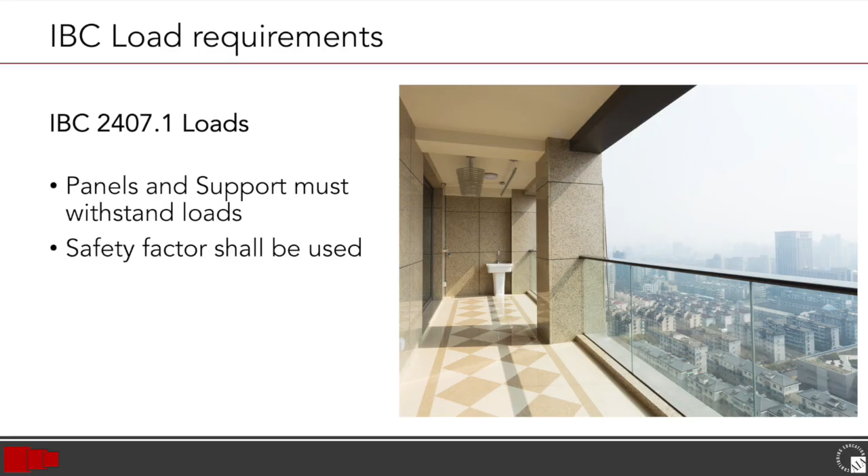For loads, section 2407.1 states that the railing panels and their support systems shall be designed to withstand the loads specified in section 1607.8. A safety factor of 4 shall be used. It's important to understand that the minimum load requirements provided in the IBC are design loads provided for engineers to be used in the completion of calculation reports.

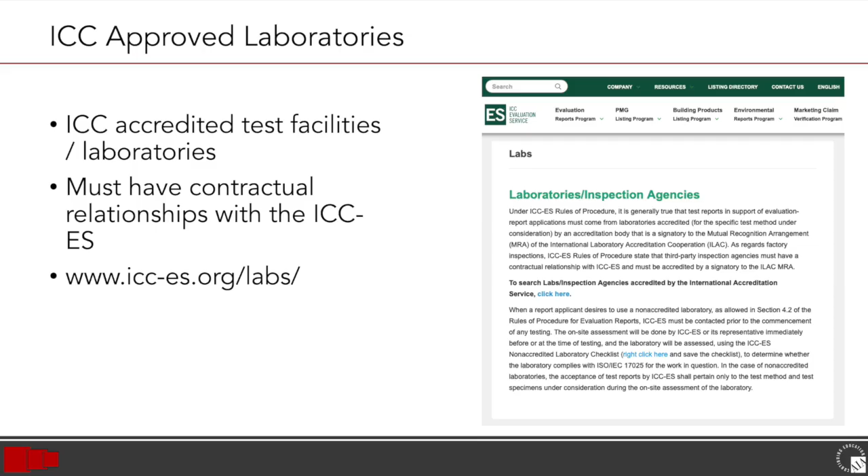In order for glass railings to be considered code compliant by testing methods, the glass railing manufacturer must work with an International Code Council approved testing facility, and the testing facility is required to follow the ICC-ES AC 439. The ICC-ES AC 439 testing procedure properly uses code-defined minimum loads and deflection requirements along with the appropriate safety factors for the glass and other railing components.

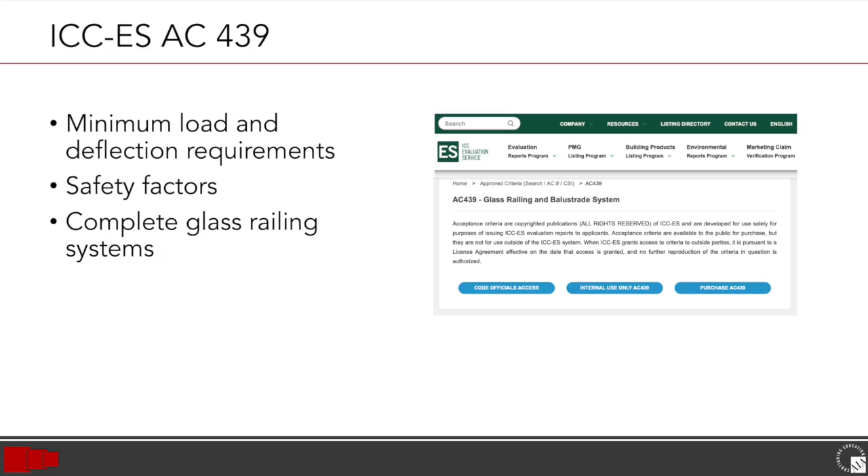These tests are performed on complete glass railing systems and not isolated components such as the base shoe, top rail, handrail, and glass. In addition to the load requirements that we have just discussed, there are other code and performance criteria that manufacturers must meet and the architect should be aware of. Guardrails or railings are first and foremost to provide safety and protection. The IBC requires a guardrail to be 42 inches in height. Handrails are located between 34 and 38 inches and have dimensional limitations for graspability.

As such, if a 42-inch guardrail is called for on a stair or ramp, it will also require a secondary handrail at the appropriate height. A guard top rail that is not used as a handrail would not have a graspability size limitation. Guards also have opening limitations to consider. The most common requirement is that no opening be large enough to allow a 4-inch sphere to pass.

For glass railings, to meet the required safety requirements, the glass must be constructed of either laminated fully tempered glass or laminated heat strengthened glass. Glass infills shall be of the approved safety glazing material that conforms to the provisions in section 2406.1. For all glazing types, the minimum nominal thickness shall be 1/4 inch. Laminated glass shall comply with Category II CPSC 16 CFR 1201, or Class A of ANSI Z97.1, listed in Chapter 35.

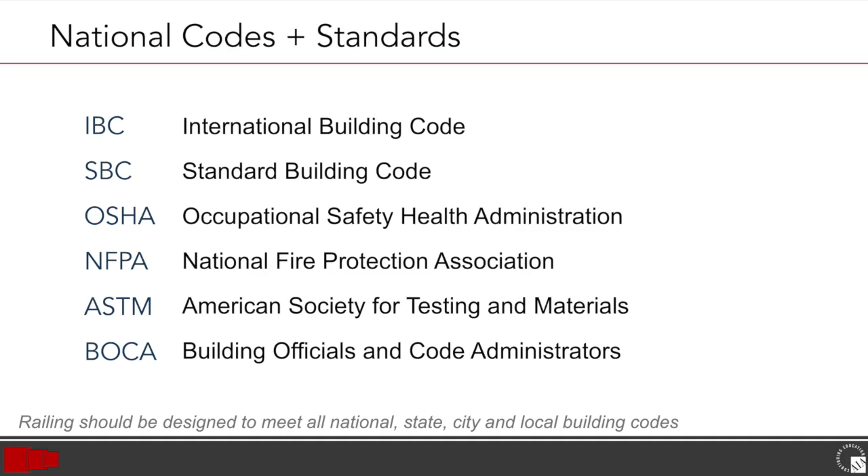Keep in mind that our discussion is a very broad overview of codes related to railings and that every state or municipality may have different code requirements. Here's a short list of codes and standards that are typically referenced in the design and installation of commercial railings. You should work closely with the railing manufacturer to make sure all the proper codes are met and that there is a full understanding of the requirements for each project.

Now let's take a look at selecting the right product for your project and product specifications. Architectural commercial railings offer designers multiple designs and performance benefits. There are numerous design options, styles, and railing types to choose from, all offering different aesthetics, maintenance, and performance capabilities. Architectural railings are continually evolving and engineered to meet the most demanding national, regional, and local building codes while offering architects unique and stylized designs that can complement or define the look of a building.

It's critical to make sure you understand all aspects of the railing products that you select and make sure your specifications are tight and clearly define the railing system you want for your project. Doing your due diligence in selecting the right railing system is critical to the project's success. Working with a reputable railing fabricator with a strong track record is vital to being able to get the support and information you need. Here's an example of a short checklist of items that should be considered when selecting a railing system and starting the design process.

A good checklist includes the following: colors, material types, and glass type, the post spacing, welded systems versus components, glass thickness, codes and standards that have to be met, required samples or submittals for the project, mock-ups for larger projects, test reports, shop drawings, manufacturer certifications and warranties, and maintenance information.

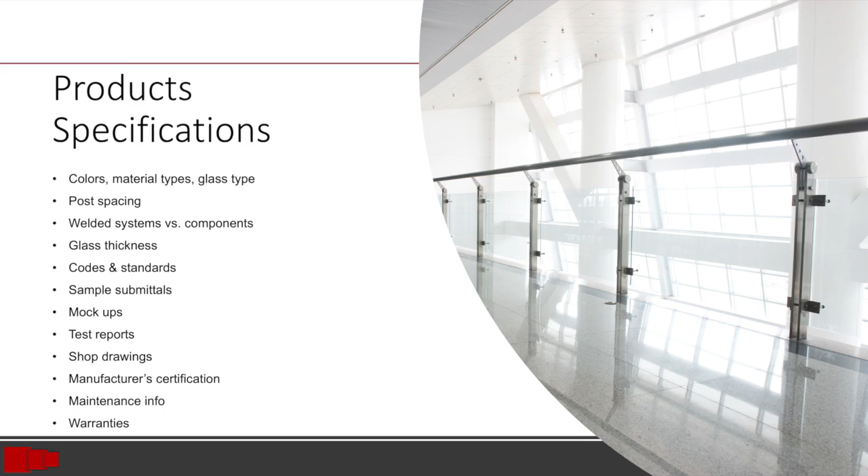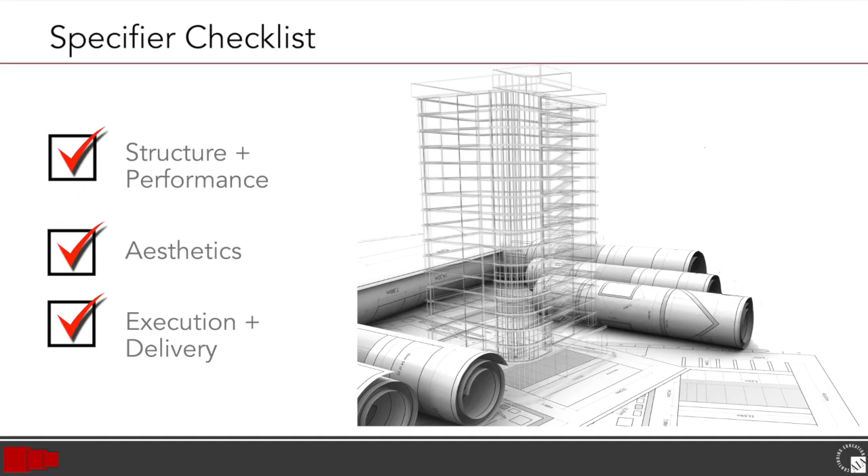Three key areas that should be considered in any product evaluation and specification include the structure and performance, aesthetics, and execution and delivery. As with most major architectural building products that you're specifying, it's highly recommended that you include your railing system in a CSI 3-part MasterFormat spec. Product Master Spec at www.productmasterspec.com is a great resource for architects to find CSI 3-part specifications by product that are correctly written and can be easily downloaded to be incorporated into your project master specification.

So let's wrap up with a few key takeaways from this presentation. We should have a pretty good understanding that architectural railings can help define a space while providing a mandated level of safety. You can certainly find the railing systems for your project, as there are numerous railing designs to choose from. If you're looking for extreme durability with a beautiful and timeless look, you should consider stainless steel. Keep in mind that all stainless steel is not the same. Make sure you understand and specify the type of stainless steel that provides the durability and aesthetics you desire for your project.

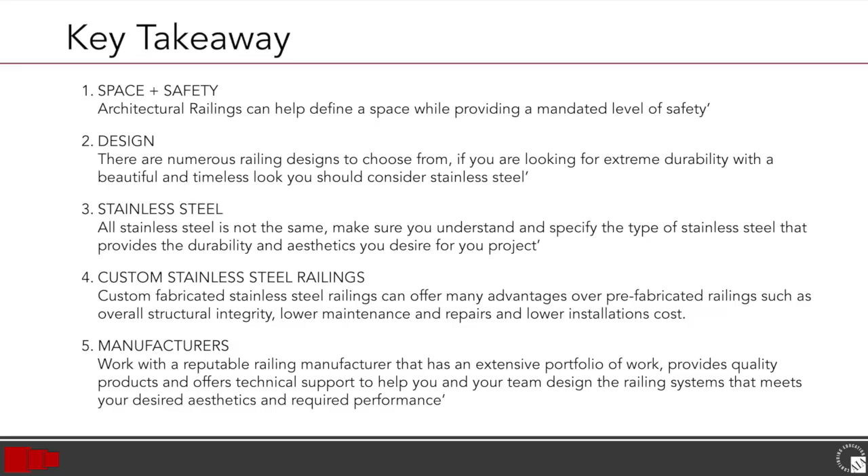Custom fabricated stainless steel railings can offer many advantages over prefabricated railings, such as overall structural integrity, lower maintenance and repairs, and lower installation costs. And with all critical products or materials on a project, make sure you work with a reputable manufacturer that has an extensive portfolio of work, provides quality products, and offers technical support to help you and your team design the railing system that meets your desired aesthetics and required performance.